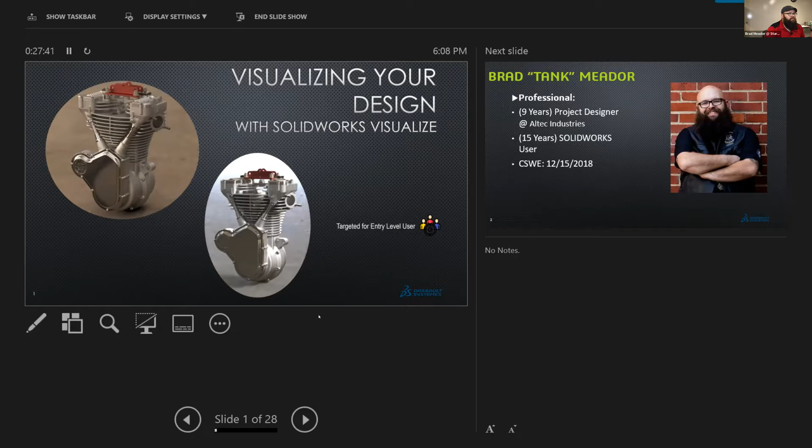But before we get too far, my name's Brad. Everybody calls me Tank. I'm a 9-year employee of Altec as a project designer. Before that, I've worked in multiple fields between the U.S. military and the U.S. government, building parts for aircraft carriers, submarines, that kind of thing. I'm a 15-year user of SolidWorks.

Like I said earlier, I was formally trained in Autodesk products, and my first job interview out of college said, if you could draw this coffee cup in this software that you've never seen before until today, then you have the job. They gave me 30 minutes, and luckily I figured out how to do it. And it's been SolidWorks ever since. I haven't really wanted to play with the other software because it's what I've been hooked on since.

So in 2018, I received my CSWE. Like everybody, I came out of SolidWorks World at the time, and I was like, man, I really want to become one of those CSWE guys that has the little flag on the bottom of their badge, because it makes you stand out, because there's only like 3,000 or 4,000 people in the world that have them. And I challenged myself in a year to get all the certifications that I could. I wanted to get it done before 2019's World, and I barely made it, but I did it.

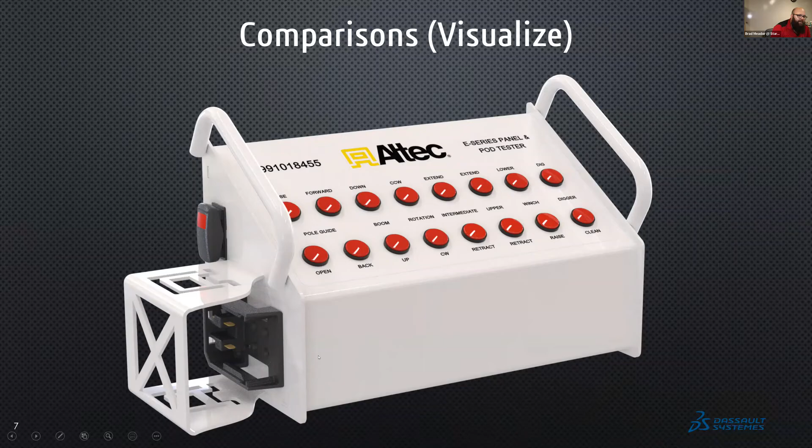Being able to go in, assign materials, assign paint colors, even down to the plastic red caps on the lights and these buttons here. These are actual plastic assigned inside. This is assigned paint white or powder coat white, depending on what you want. Yeah, Altec white.

But we can go in and customize any of those colors to whatever Pantone color you want. So being able to accurately show what they're going to order and see, this is what I'm paying you to do, not just here, draw me something up real quick and we'll go from there.

So pull back over here. Where'd my mouse go? There it is. Oh, no, it's back there.

It is. Yes. So Visualize actually comes with Pro and Premium, as long as you're on the subscription. Yes, but not on the standard. Okay, correction. And you have to be on the subscription. Yes, okay, so Pro and Premium licenses under subscription, correct. That explains why we only have one license for all of us.

So here's kind of an idea. This was the design that we were asked to create for the splash screen, right, for Altec. Yeah, this doesn't look very good. Kind of looks like a cartoon. Yeah, it does. All the black lines, all the edges. Now I can go in and turn the edges off.

Yeah, so yellow is aluminum. Magenta, I think, is stainless steel. Regular steel is kind of a gray, but if I wanted to apply some paint color, I can sort of. It doesn't really showcase what this thing's gonna look like.

So, you know, having to go in and play around with it, if I showed this to a customer, which we have before shown these things to customers, they usually come at me with questions of what's with the yellow, what's with the blue, what's with this blue piece here that's actually plastic, or this whole part right here is all aluminum that's painted. Why is it yellow?

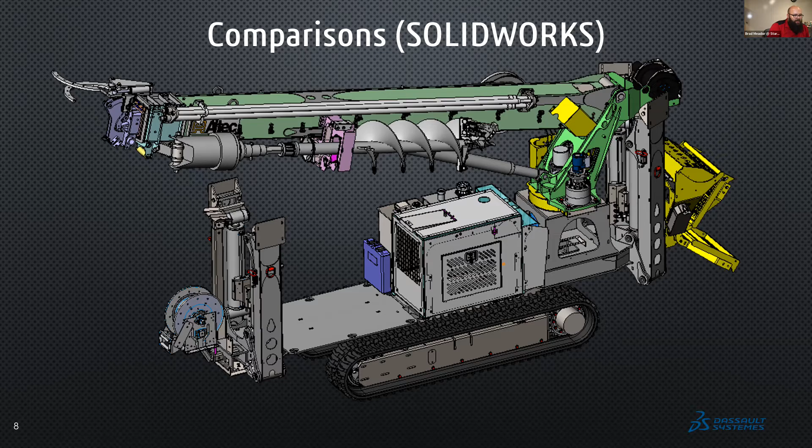So we've gone back to, come on now, go back. There it is. There it is. So this one is the right monitor up there. So we played around with it a little bit. It took me about a month to learn how to throw things into Visualize, how to compare them. So we have some stuff thrown in.

We have painted materials. We got rubber. We've got steel. We got chrome in on this. So if you see, we've got chrome on the chrome rod of the outrigger cylinder here. We've got rubber tracks. I've got even plastic dipped red handles for the safety feature, and the black painted pins, just so that we can make sure we show everything correctly. Because I want to make sure that my customer gets to see exactly what they're ordering.

And this is kind of where I started to learn and touch on the software a little bit. It was like, you know, why aren't we using this as a product? Now, for those of you who've used SolidWorks a lot, have you started looking into doing renderings before your product to showcase something? If not, why not? There's a rendering platform built into the software as well, but Visualize is a little bit more powerful and gives you a little bit more options.

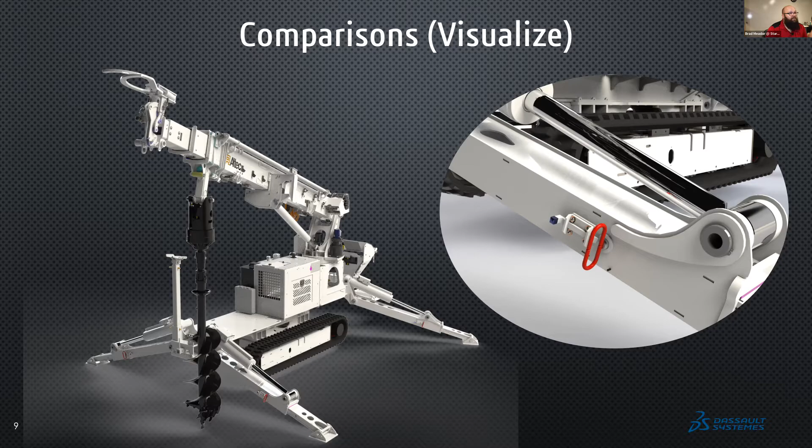So where are we going to start, right? How are you going to start with it? So to quote Adam, let's go to the CAD mobile, except what? That was weird. I know, that's ugly. We're going to the CAD mobile, except we're going to go to the render mobile, the render wagon, I guess.

Uh-oh. Share screen again to screen share. Now, all right, now we can see. Again, we should rename this the technical difficulty SWUG because every time we've gone somewhere, one little thing happens or another.

So, I know. So here's your main startup point for Visualize. Now, you can come up here and we can go up into the top and go to new. It'll create a project. It'll actually create a bunch of folders in the background. It'll tell you where you put your projects. When you install the software, it'll give you a spot for all your images, all the models that you download, all the materials. It'll let you do all of those features. It's out of the way here.

So we can come in here, we can actually find a new model we'd like, or we can import a model, which is what we're going to do. And so the best part about this is we can import a model directly from a SOLIDWORKS assembly. Snap to the floor. We can import it as we go. And there's a few different ways we can import them. So we have these options here that come up.

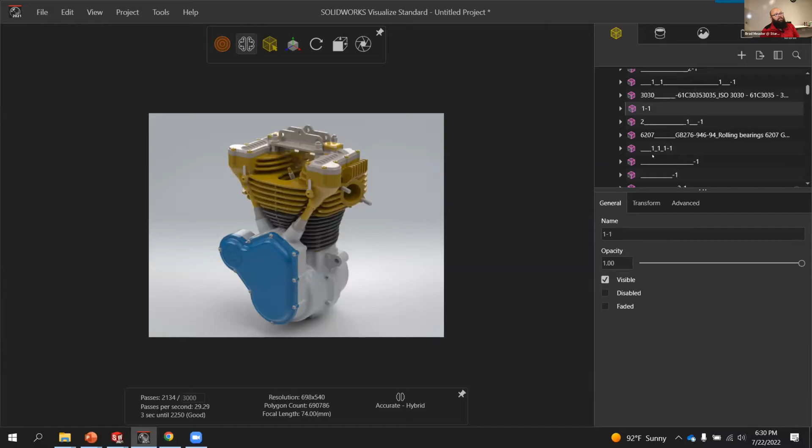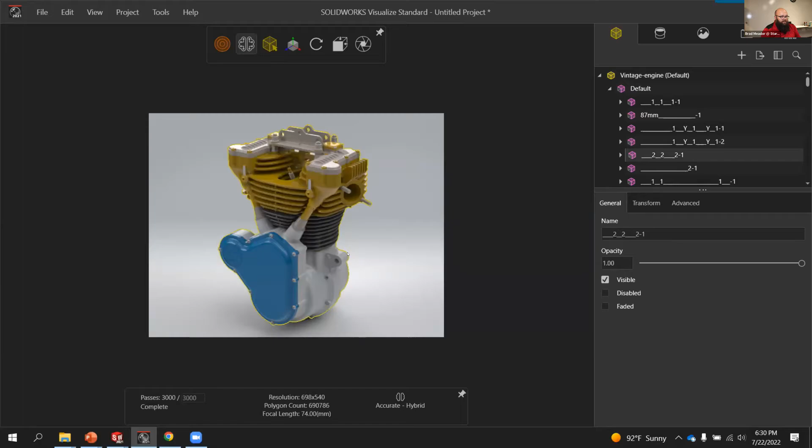So go back to general, scroll up a little bit. And so up here gives you a little default explanation of all the parts. Come on now, we slow. There you go. Now, this will allow you to pick through the tree of all the parts that you have, and you can select certain ones you want in the tree, or you can come in here in your viewport and click the things you're looking at changing. So it gives you double options if you know a specific part name you're looking for, or if you know what it's going to be shaped like. And then when you select a certain part, it'll highlight it with I think that's yellow, but I'm not 100%.

So we'll zoom in on this plate here. This one's in red? Okay. Yeah, because this does not help me at all. Okay.

So we're gonna go over to our appearances tab. Notice you can pick some cloud appearances if you had a cloud library set up, or you can do what's on your local, which is pretty much where I've been working from the entire time. And we're gonna go into automotives, and you can pick different materials. You got lights and things. We've got glass if you want to do glass. We've got weird gems and things. We've got mesh. We've got metal. So what's a big thing on motorcycles or in hot rod cars? Chrome. We just come and drag it on there, and now it's got chrome on it.

Now, I don't want to be one of those guys that has a chrome cover and doesn't have chrome bolts on those covers. So I can come in here and drag chrome and just drop the chrome on all the bolts that I want. No, zinc yellow rusts.

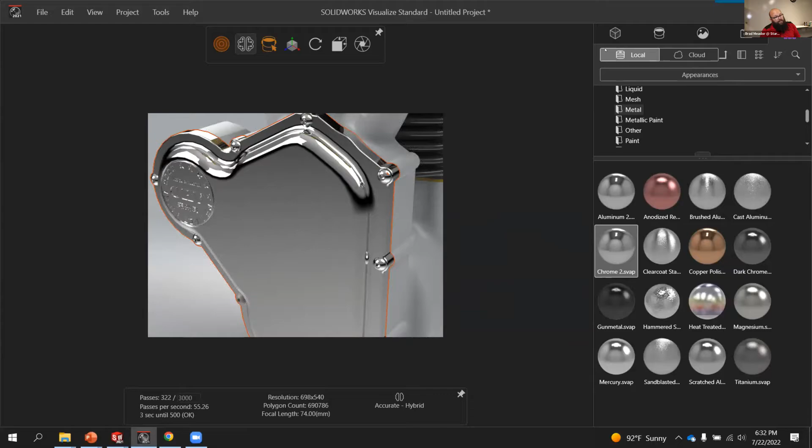If you did that as a pattern, would it do it as a pattern? In other words, if I had all those bolts located as a pattern and I click on the master one, can I make it do it all? You could select them in the tree, I believe. I've never really played around with the patterning capability. We're doing them one at a time. That's something that's still relatively new, at least to me. But it's not going to bring in any SolidWorks features, including patterns.

If you had them set up as a group of specific bolts, or a texture to begin with from SolidWorks, it'll pull them in as a group, and then you can select them from there. So if you know you're going to go into Visualize, you can pre-select the things you know will be a different color in the rendering, and change it there.

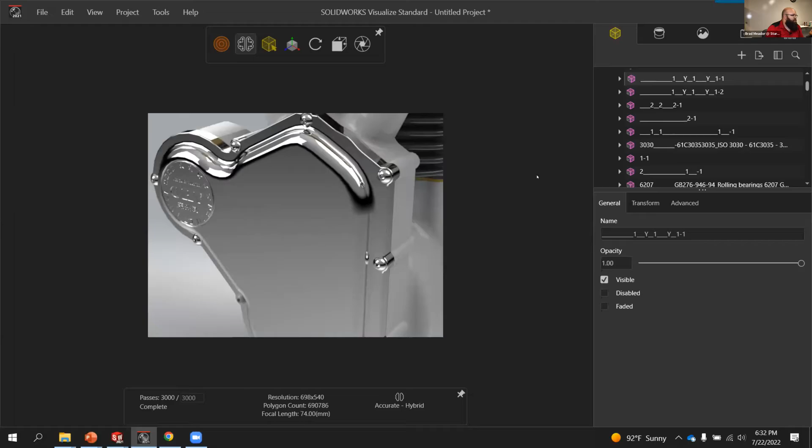Chris online made a statement saying, based on what he's saying, it looks like the video is very part driven, that's why it's rendering it. Yes, it is. Very.

So we'll go back to our textures here. We're not going to do this whole model, but I could just throw some stuff in there, just to get some photos in and whatnot.

Yeah, Chris is actually one of our guys from work. Yeah, Chris gets a gold star for being.

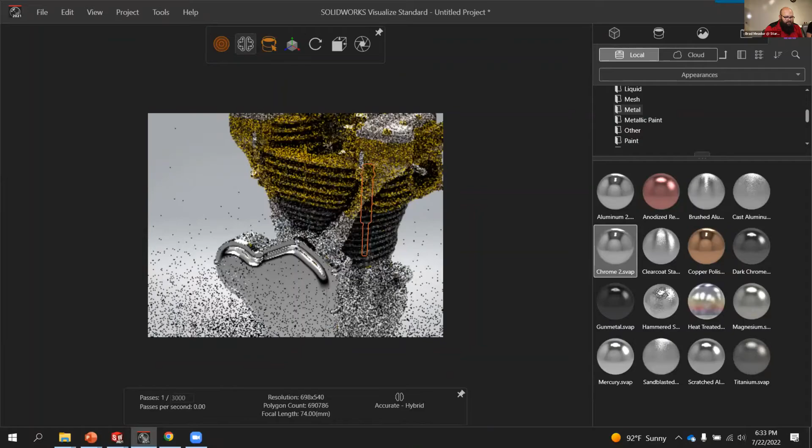So let's do some cool stuff in here. Another one of the big new things coming out is copper or brass on hot rods. I've seen some nice hot rod copper parts, so we're going to throw some copper polished pieces in.

And it's just that easy. You know, I want my customer to see it, and then I can update this picture as we go. But it's something that they want.

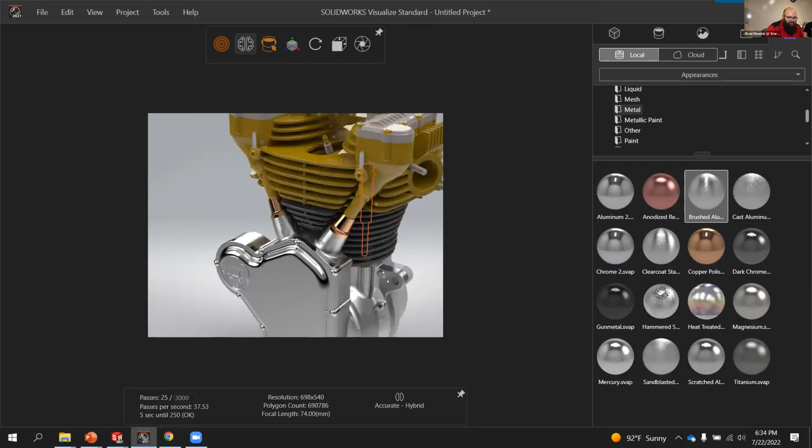So we're going to come in here and let's say this is now brushed aluminum on the case. Actually, no, let's go back - cast aluminum on the case, both front and back cases. And now we've got some parts here that are set up, right?

Well, does it look fairly good? Let's just pretend we did the whole model all the way through. Does it look okay all the way through? Now it looks good, but what about this background? It kind of looks like not a perfect background for this - nobody's going to sit an engine in a white box and take a photo of it.

Come on, we're going to come over here, come back, and find some backgrounds. We've got our environment, which has all the lighting in it, and then our backplate, which is what you're seeing in the back of the actual view. So you can change both if you'd like. I like using the high contrast lighting because it gives you lots of reflection and lots of bright edges to show, makes it look kind of outside, but we can come in here and change all kinds of things.

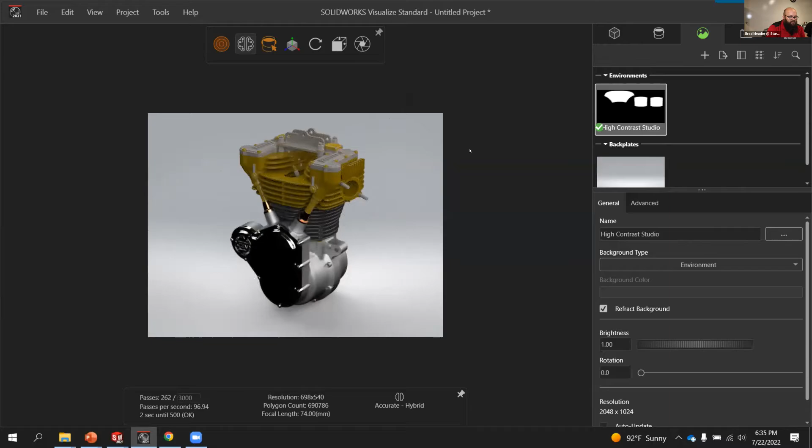So if you come in here and change your environment, we can come in and pick - so we can do studio color. It'll change the lighting, kind of give you a little bit different lighting feel. We can come back and let's pick Dazzler - I've never seen that one before, let's try that one. Not very dazzly, is it? No? Okay, so let's go back to the high contrast because that's fairly good.

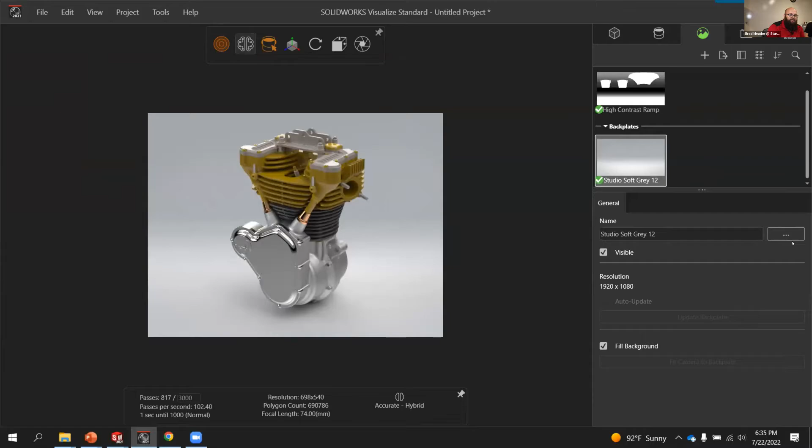It shows - I don't want studio, I want the ramp. Gives you a good representation of what the chrome's going to look like, where all the light's coming from. But I'm going to change this backplate up a little bit. Notice all I got to do is click on it and it gives you an option to change things. So I come in here and I can pick retail store - let's go pick this retail store and open it up.

Let it do its thing, let it think. Looks a little big, doesn't it? Well, we can come back, change our cameras and stuff, and zoom in on the part and move it around to kind of get where we'd like.

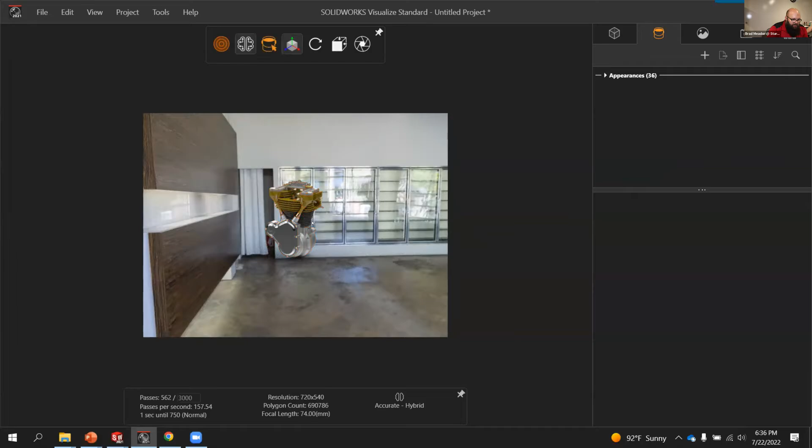Now some of these backplates will allow you to update and change - you can sit it around and move your part. Let's move it around here. Oh no, I broke it. All right, oh no wonder I can't see it, I got my stuff all the way around the way.

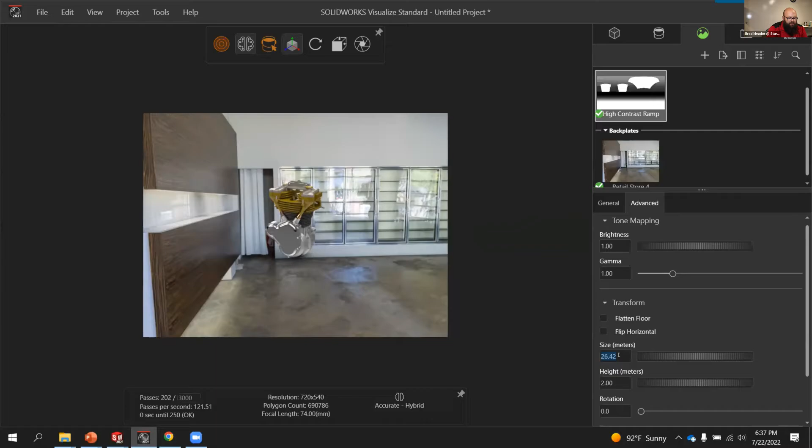All right, advanced. So we'll go over here and we can change the size of our background in relation to the size of the part you have. So we're going to kind of move this back up to where it looks decent, and we're going to change this thing. Let's go to 6 and just see what happens, and we'll set the height to 10.

Wait a minute. Oh, never mind, hold on, let's undo. I'm in the advanced of that one, not where I need to be here. Okay.

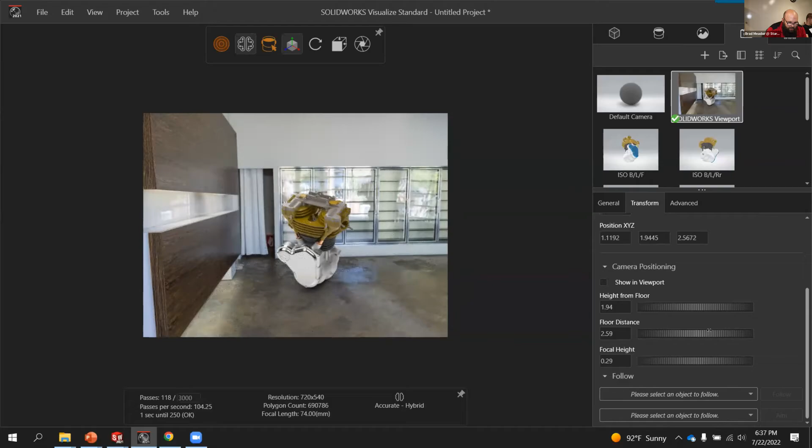Back to our camera here. We can change kind of where we want to sit this thing. We could say height from floor, floor distance. We can move where we want this thing to sit based on where our camera is at and get our right perspective.

This still looks like a really large engine for that office space though. But I mean, it is true, we could put it in the office. It's just things you can do and play around with your renderings and get it where you want.

So you could even go in and download all these backplates. There's websites where you can, they're called... I'm trying to figure out where we had the backplate file type. There it goes. As you can see, on a laptop it's a little bit slower because it's really, really resource intensive. So you probably wouldn't want to have both SolidWorks and Visualize open, but it just gives you an idea of what's going on.

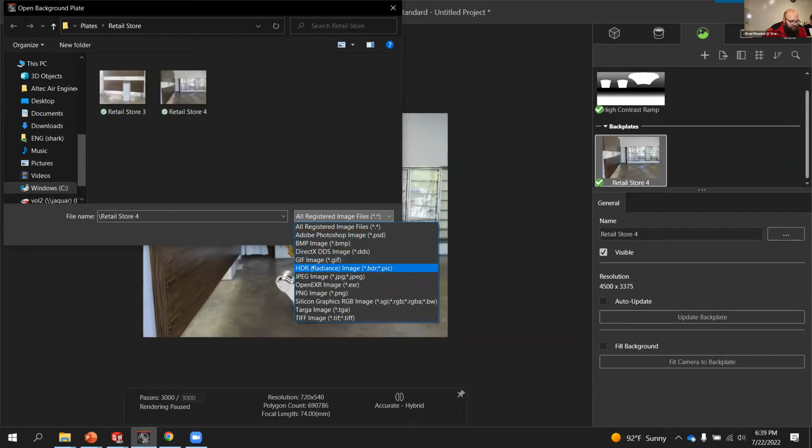But in your environment or background here, you can actually take and download any of these. I think it's called an HDR, or any of these. I think the one I used before was an HDR file. You could download any of these and use them as backplates. JPEGs, you can even use, it looks like it uses GIFs or whatever you want to call it, PNGs — it'll allow you to put in any background you'd like.

So if you have a picture of your office out front and you want to render something in your parking lot, why not try it? Get a really good high quality photo of your parking lot, and then you can start picking your parts in and start throwing them in.

Oh yeah, or the picture of the motorcycle you want to put in your office. Then fool your boss and send him a picture of his office with the motorcycle in it. Do you think that? Especially when he's working from home for a couple weeks. Yes, that'd be a great prank to play on somebody.

I like that. But yeah, it gives you nearly unlimited possibilities on how to get the picture you want to show your customer. If your customer's got a specific spot in the shop where they're going to build this machine, go in there and get a couple really good camera shots of where it's going to sit, and then render it where it's going to be.

Not that I found yet, because the way the background actually works, it pulls — at least most of these backplates come in as a circular photo, like you would use for a spherical photo for VR. A lot of the stuff is set for VR, so you can use it that way. If I'm wrong, there was something within the last couple years, I don't remember if it was made remote or what.

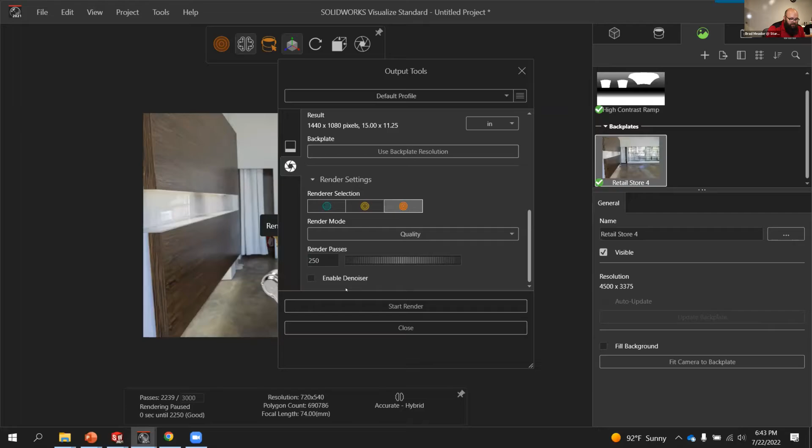Yes, not the integrated - this is actually dedicated for SolidWorks and rendering and all that. And it's done, so it's ready to go. So we can pull it up.

It just tells you where the location's at, so I can come in here, click the copy button - there's my SWUG 1 photo, and we can open it up full screen. And you've got it, and it even has the reflections and stuff in the photo that was inside the office beforehand. It's fairly good quality - you can zoom in pretty good.

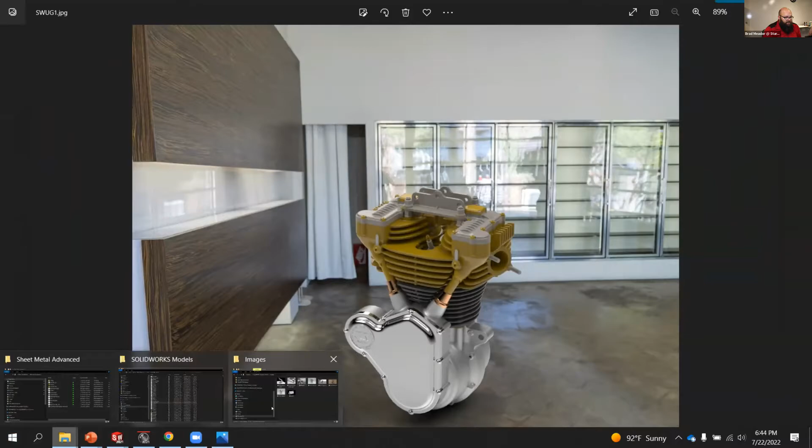Now, do you think your customer would want that more than just a regular camera screenshot of your part? I would think so - what am I paying you for, to give me an artist depiction when you can get a full rendering of it? And it didn't take very long. I think when I did my full rendering of this file, it took me a total of 30 minutes to set the floor concrete and set all the material. It wasn't very much extra workflow to pull all the data to get it done. It really is fast enough.

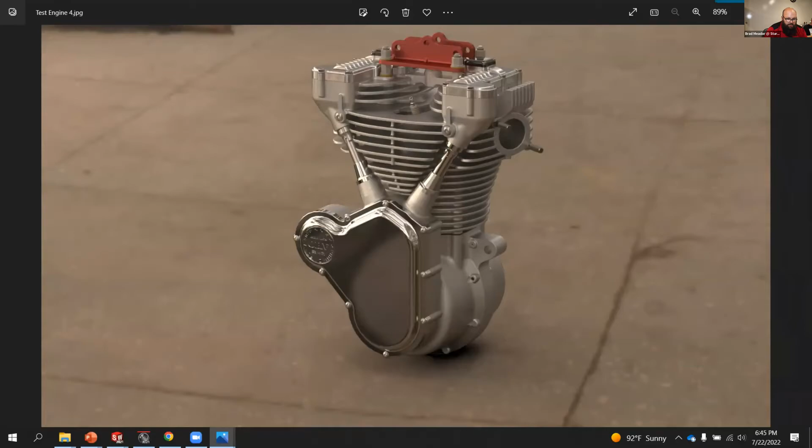It looks like on the other rendering you could set the material or whatever for certain parts - stripes or strips, yeah, you can do all kinds of textures. Like if you wanted the base material to be brushed aluminum, but you wanted the thin edges to be black powder, we could do that as well. It just kind of gives you an idea of what you can and can't do, even with these materials down here.

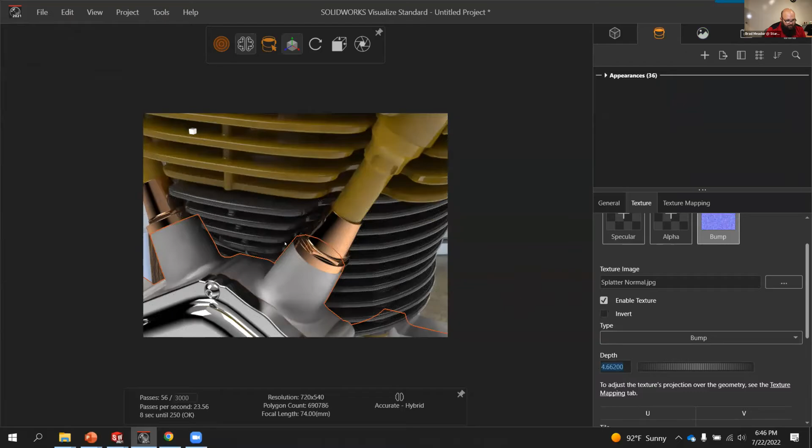So we can go down and pick our texture - that cast aluminum. You can come in here and pick the depth of the texture, make it really bumpy or not bumpy at all. You can even change it - let's go to displacement from bump, stick it there, and then we'll zoom back out. It allows you to pick and play around to get the most accurate rendering.

Come on now, I don't want to see that again. There we go - the most accurate rendering of your part as possible. So just take some time if you have a chance to play around with it and try it.

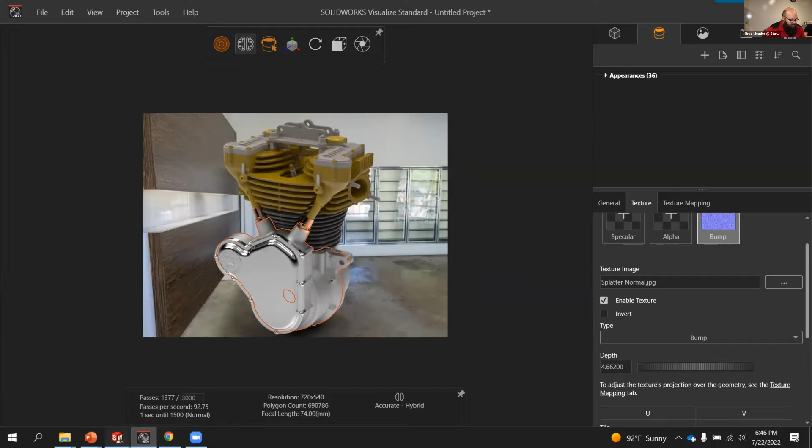Go back to our PowerPoint here. So we'll skip through because we went ahead and did our camera selections and ISO. So we'll touch on the camera. Now that I've got a rendered material or a selection of material, I can go and actually pick cameras, much like you pick your SolidWorks views.

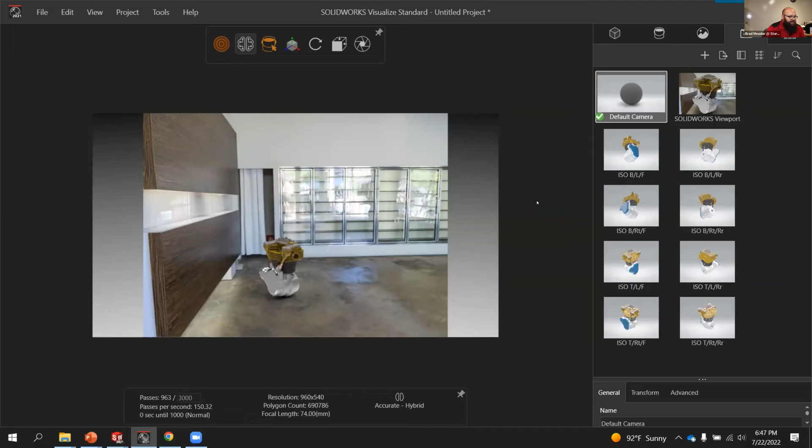And it'll sit. Well, hopefully it'll do it. Come on now. There it goes. And it'll pull different views as you need with the same backplate that you've picked. Or you can go back to your default. So it just gives you some freedom to play around and get what you need. So that looks a little bit more realistic. Still a very large engine, about the size of a coffee table, but we got what we were looking for. I know this is like a Norton or a BSA.

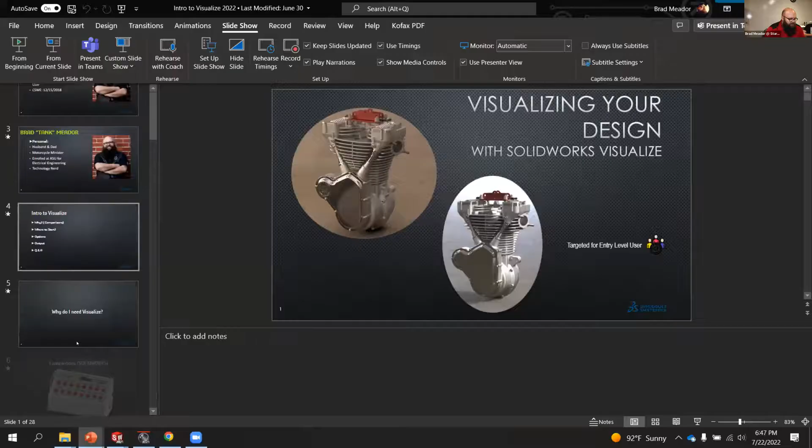But we're coming up on the end time here in a minute, so we'll just do a general Q&A, kind of stump the chump kind of thing. Oh, come on now, don't do it from there. I know. I'm so used to running it from the beginning. So any questions either about this Visualize thing or just in general SolidWorks problems you run into? If you've got a question, we can try to solve it or try to break the software.

So does any of the rendering follow the part if I send the customer a model? No, it's a whole separate file. So if you do send the customer a model and they like it, or if they're going to insert it somewhere, the rendering is just a photo at that point. Yes, JPEG or a TIFF or a PNG, whatever your output would be. It'd be good for marketing if you're trying to show them what it would look like in place. I do not know. I've never really looked into the metadata because I know that's very advanced.

We just added renderings to our website. Oh, okay. We had photographs. If you've ever tried to photograph something that's all black, it doesn't do well at all. No. The good thing about the photograph versus the rendering, it's post engineering changes. That's true. You won't ever have to worry about it looking different than the parts you get. Yeah, but this allows you to actually take those direct renderings and drop them right on your website. Send it to your webmaster and get whatever he needs for it.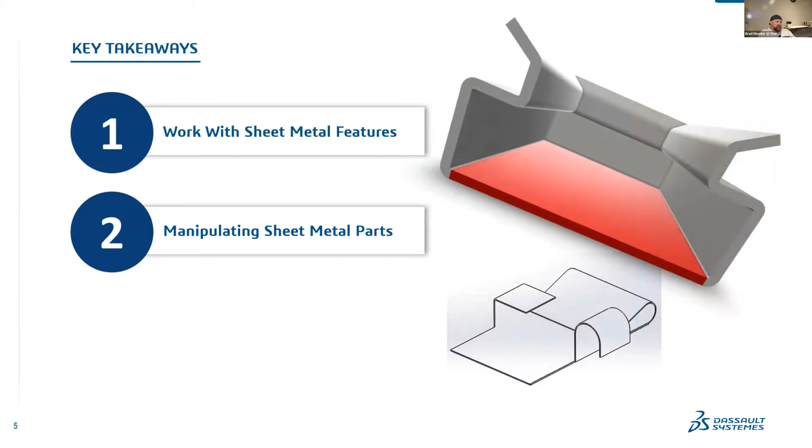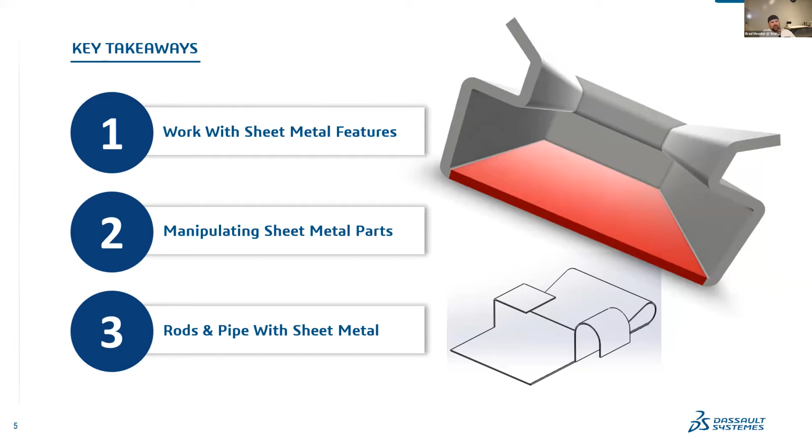So today we're going to talk about that advanced sheet metal. Some of the key takeaways we're going to look at is how we work with sheet metal and some of those features that are there, how we can manipulate sheet metal parts in different ways. And one that I like to focus on here, along with some other stuff, is rods and pipe with sheet metal, right? A lot of people just want to sweep it and extrude it through a sweep, and maybe they create the bent pipe or the bent rod, and then they go back and they sweep one that's straight so they can manufacture it. We'll get to that here in a minute, so I don't want to get too ahead of myself. I do get excited when I talk about some of these things.

The very first thing I want to talk about is sheet metal, and I brought this up in the beginners. I just didn't go as much in depth, just kind of brushed over and said, okay, gauge tables or manually inputted information, right? Gauge tables is going to be a winner chicken dinner every time, right? When you go to create your sheet metal part, if you have gauge tables that are developed and in the background for your file location to be able to find that information, you don't have to worry about mistakes. Unless, of course, they're inputted there incorrectly, but at least they're going to be consistent mistakes, right?

Because whatever you tie to this sheet metal or gauge table, everybody is going to do the same thing. If you've got 50 employees that are bending sheet metal on SolidWorks and you need consistency for your press brake operator out there, get in with gauge tables, right? It's very simple. All you do is create an Excel spreadsheet. You can basically look at this slide and create it just like it. All you need to do is say what type of sheet metal table it is, how your process is, your K factor, your units, and then you just build the columns out to where you list what the thickness of the sheet metal is and the gauge thickness and then the bend radius, right?

We have a few different ones through our different organizations and some share the same gauge tables, but that's only due to the fact that maybe at our final assembly plant, they want to be a little more precise because they've got some tolerancing things that have to do with some critical units, right? And so they may want to go to 4 decimal places, whereas we may only want to go to 3 decimal places. So that's a very important key factor here too. You don't have to worry about somebody inputting the information with the wrong decimal place or even the wrong number being off by a fat finger. Who's guilty of fat fingering things? I know I am, right?

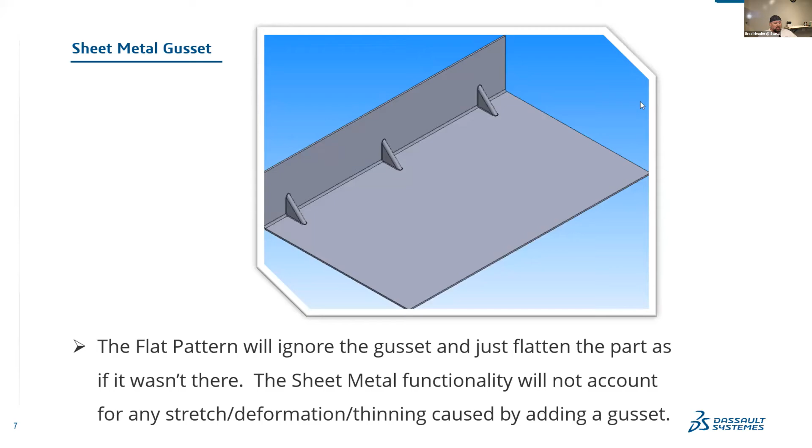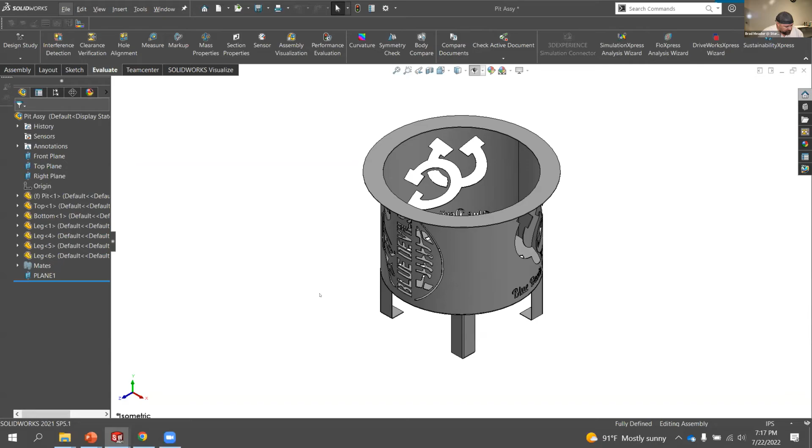But yeah, so to the CAD lab. Right here. All right. Let's see, where are we living at here? Okay, so here's our sheet metal gussets. It's basically, you just have a piece of sheet metal. I'm just going to kind of do this for just basic illustration. Let's press this guy. When you create your first one, you're simply going to click the faces that you want that gusset to go to or go between, and the edge that you want it to kind of point at, right? Or vertex.

As you do it, you can set the offset of how far you want it to be off the edge, right? And then you can set your depths and your angles and all that stuff over on the left-hand side. The next thing I did pretty much after that is I just went ahead and I patterned it out. That's pretty simple linear pattern, right? Told it I wanted 3 inches off the other side just so it matches.

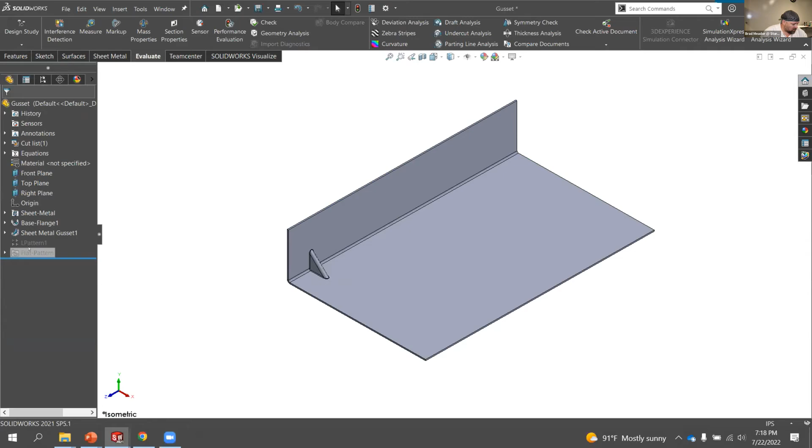Any questions about the sheet metal gussets? I mean, they're there. It's definitely able to be taken advantage of, but just to warn you that there are some issues with it because it doesn't show any kind of stretch or deformation. Same thing with forming tools a little bit too. And we'll get to that. Okay.

All right, so forming tools. Forming tools are a lot of fun. We use them a lot at Altec, whether it's to do louvers or what's similar to a tread plate to put a little knurled knob up, you know, for people to get traction on when they're walking. But the basic thing about forming tools is you have to know the tool being used, right? If you don't know the tool being used, you're just throwing stuff on a part just to say it's there. And then you get out the shop.

Let's say you made this little louver tool, right, as 2 inches long, and then you pattern it out 3 inches out, right? And you start that pattern. Well, what if it was a 4 inch, right? What's the backside of that patterned gusset look like? Oh, yeah. We can go back there and look at that. Backside of the patterned gusset. So let's just back up just a moment. It's basically a recessed indentation.

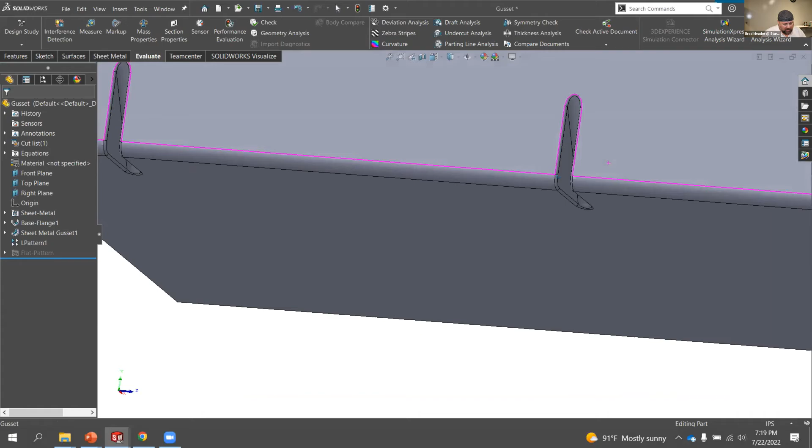Yep, just like that. Just as if you had a die or you're stamping these out. You can change the radii of this too, so that way it looks different as well. And that's all, again, based on your tooling. No different than it is with the forming tools. The sheet metal gusset is very similar to what a forming tool would be. You're going to have a tool that would actually do that. And of course, the gusset size and radii and all that stuff, that's all going to be dependent upon the tool that's used to press it.

Like you said, take it to flat pattern. Yeah. So check out the flat pattern on this guy. So let's go and just look at the flat pattern.

Oh, you got yours set up. We traded machines, so he's been working with all my crazy hotkeys that are different. Now I'm on his machine today, and I'm doing this.

So yeah, let's look at it. I got it in an isometric view, and let's just look at the sheet metal. It doesn't account for it at all. Not one bit. It's just a flat piece of metal. And we all know when you push a piece of metal in, it's going to stretch, right? It's going to have to give somewhere. You put a huge gusset in there, like I said, it's going to rip right through it. It's going to shear through it, right?

I wonder what logical case you could call to use that. I've never seen anybody use a sheet metal gusset. There's a few other little glitches that kind of work that way. Forming tools can do some of the similar issues, but you can account for that a little bit more because it's stamped into a part and they're not huge. You're not really trying to tear into the metal as bad. And usually you have an opening like a louver that helps out with it.

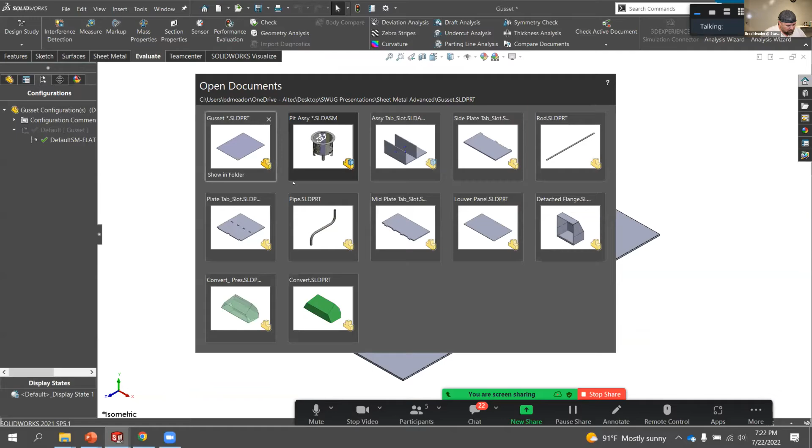Did it open? Did we see it? Yeah, it keeps jumping back. Where's SLD? Should be there. Yeah, put it in there. You see it? Louver panel. That's the panel with it. I could probably pull it from there.

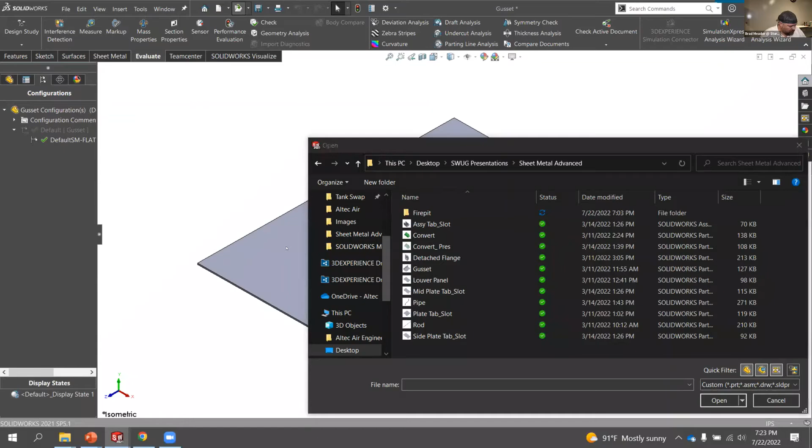Try it. Okay. Yeah, I've got it in here, so I can unsuppress it. See if I can grab the tool and open it. No, it's not gonna let me grab the tool and open it. All right, so I'll go ahead and just create one for you real quick on the fly.

Again, this is live, right? Didn't account for it. So when you model your tool, because basically what we're modeling is the tool, we need to know the radius of the tool, the length of the tool, what type of tool it is, if it's going to actually shear a portion of it, so we know what we're going to open up and show open to the sheet metal. So we have to know that information about the tool. I'm just going to use something generic.

Let's go to the right plane and see if you've got extrude boss in here. No. So we're going to go up here. We're going to go extrude boss. Now I'm just going to draw something fairly generic. Let's start out here, up. I'll give it a little bit of a taper here. I'm going to come back to the dot.

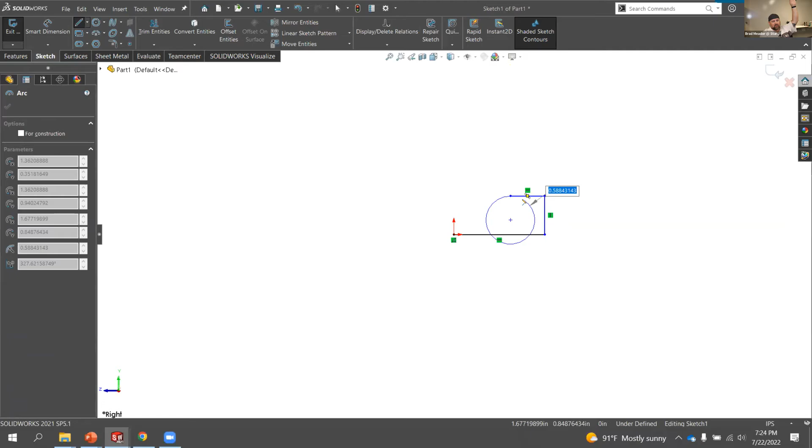Anybody know what happens when you come back to the dot? Turns it into an arc. And not only that, but whatever quadrant you come out of that dot is where the arc starts. Come out of the dot. I'm coming out here, so I want to bring it down. And then I'm going to come back to it again because I want to bring it and come here. Now notice when it came out of the dot, it actually created what kind of relationship? Tangency relationship, right? Because it also insinuated with a yellow box prior to that it was going to do it.

In one of my previous illustrations, I think it was last night's presentation, what button can we hold down to temporarily turn off the snap function and not create relationships or snaps? The control button. If we come in here and I draw this line, see how it's giving me a yellow line? That tells me that it's assuming I want it to be horizontal, so it's going to create a horizontal. If it was a white box with a line, then it would just say, I'm assuming that's where you want it, but I'm not going to create that relationship.

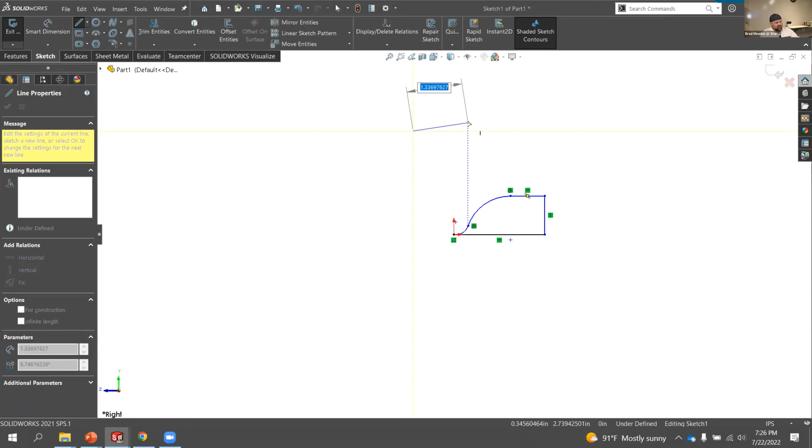But if I hold down the control button, now look what happens. No different than if I'm trying to come over here, see how it's giving me a concentric relationship? But if I hold down that control button, now I can put it anywhere I want, and there's no snap relation at all. So just a tip and trick from last night that I reiterated today. All right, so we'll just say that's fine. We want that to be like that. So let's go ahead and check that off.

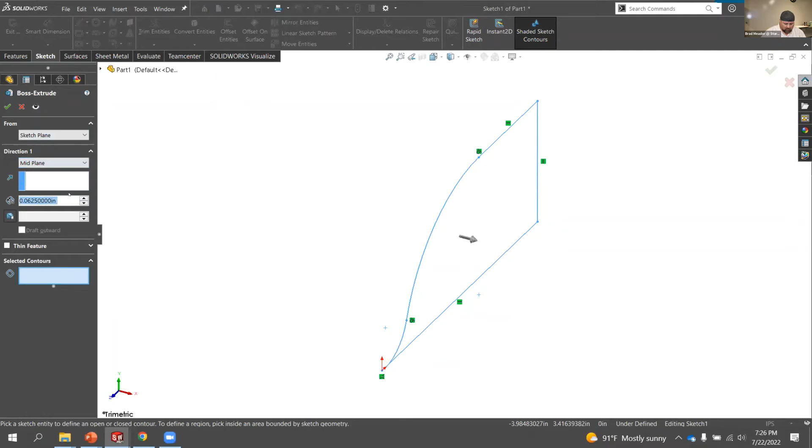I could also use the D key to bring the breadcrumbs or the confirmation window to myself. I want to go about the mid plane here. Let's make it 2 inches long. Very bottom point. Radius. Yeah, I see that. Let's just come out of it and come back. So we know we can click this line and this line and make them tangent, but you can also just click the point and do it too. Let me put that back at isometric. We're going to bring the D key to me so I don't have to go fetch the confirmation window. Now we just need to create the extrude.

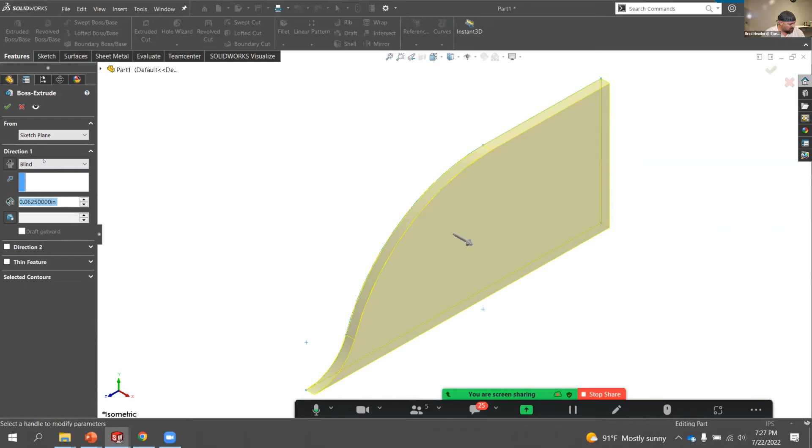Nobody would be upset that was not defined? It was not. You're right. Because we define every time. All right, so I've just got this basic louver. I'm not going to go into depth and trim and fillet the radius and all the edges, because I could go in here and create an axis and draw that down. I could actually convert entities, create an axis, and rotate it down 90 degrees on each side. Well, all right, so now

go to our forming tool command. Notice what I used. I used the command search. I didn't want to search for it on my buddy's machine. So I went up here to the command search, make sure you've got commands listed, and typed in what it was: forming tool. I can click it to execute the action, I can poke the eyeball to show me where it lives, or I can drag it onto the ribbon, and then my buddy's got forming tool living there until he decides to get rid of it.

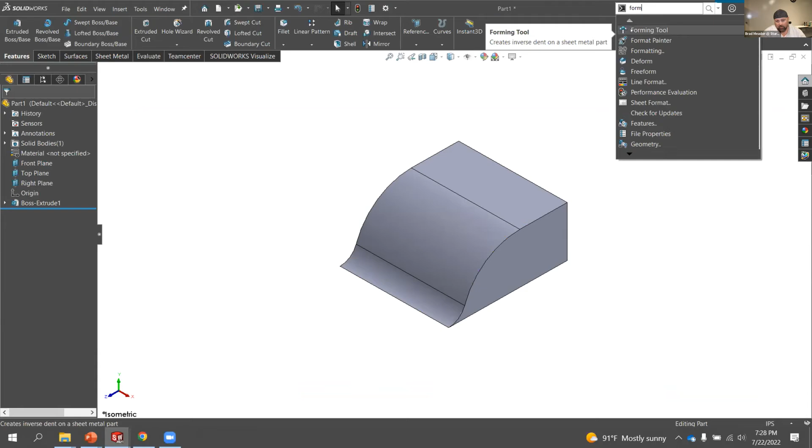All right, so we're going to go ahead and do it. We're going to talk about the stopping face. The stopping face is where that tool presses into the metal and then stops. So say this is the tool.

And this is the back plate of that tool. This would be the stopping face, right? Now, if we have a face to remove, which in a louver you do, you're pushing this through, you're removing this face here. So we click that for our removal face.

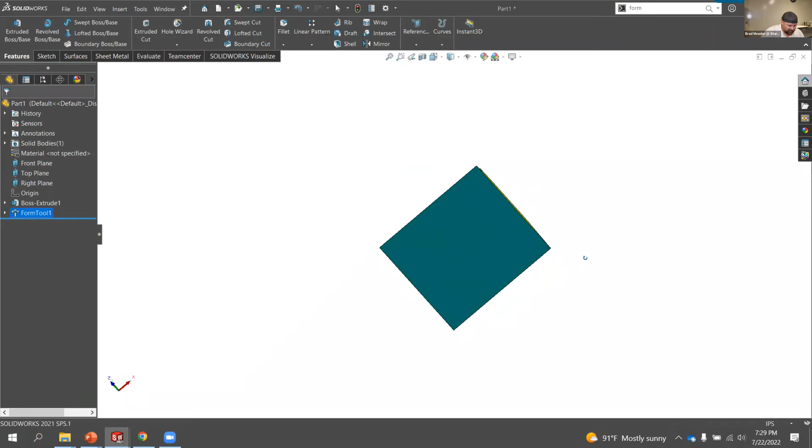Notice it changed colors, telling us this is a forming tool now. We have your stopping face ready, indicated by a teal color, or whatever color you designate it to be in your color options. And then you have your bottom face, which is red, showing that face is going to be removed. Red, delete, makes sense. Okay, now can we just save this out?

We have to save it as a certain file type, right? Actually, SLDR may work. Yeah, right here it is. Forming tool, SLD-FTP. So we have to save it out as a special file type.

Now, the thing to know is, where are you saving your forming tools? If you're going to use them later, you got to know where they're at. Somewhere something is going to need to reference it. So for this purpose, I'm just going to save this in the folder that Brad and I have shared here for the week, which is SWUG Presentations.

And then I'm going to go ahead, and I bet it's in there. I bet I'm just not seeing it when I tried to open it because I didn't label it. But so this is going to be a second one. I'll just throw it in the main folder, SWUG presentations part 1. Okay, now it's there, right?

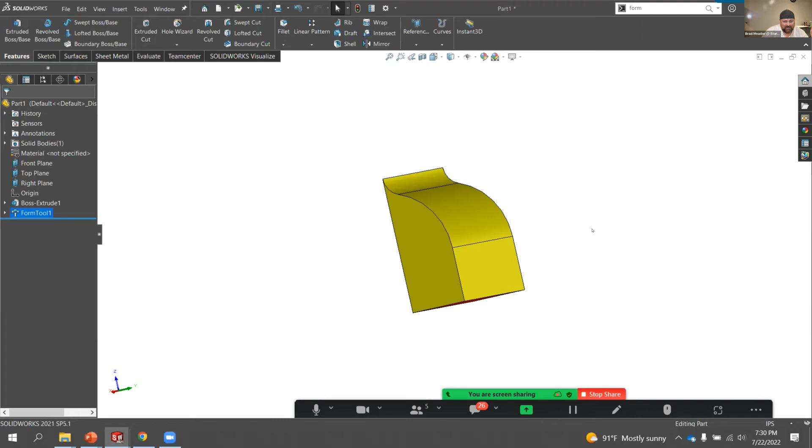But how do we access that forming tool? So if I go ahead and tab over to the louver panel I was using, notice this one's a little prettier because I did it ahead of time and made it look a little prettier. But we have to pull it from our library, right? Well, we have all these library options, and a lot of them are custom, but I don't see, I'm confused. Where is it?

It's not there. Well, we have to set that file location. So we got to come up to our system options. And this is the same place that Alex had asked earlier about the location for the diameter symbol stuff. So it's going to be kind of in the same place, in a different drop-down menu. So system options, about halfway down, we're going to go to file location.

Then we're going to come down here and look for our forming tools because we want to add it there—or our library, sorry, not forming tools. We want to add it to our library. Where's our library at? Right here, design library. We want to add it to our design library. Now we need to add that location. Where do we put that? You can have all kinds of forming tools or sketches or whatever you want to be able to drag into stuff, and just add it in one library wherever you want it.

So we're going to add that location. Look, it already defaulted to where I just saved it. So we're going to go ahead and select this folder. We don't need to select the part, because if we select the folder, which is listed here and what we're in, it's going to pick up anything that's in there. So we'll select that folder. Notice I added it here. Now we say okay.

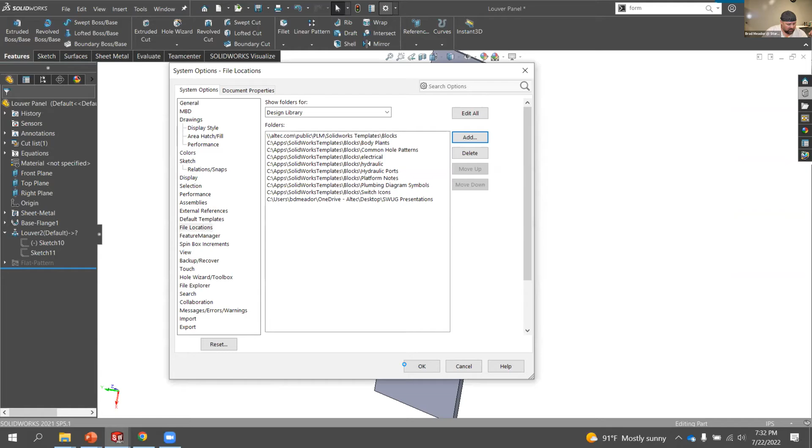It asks, are you seriously trying to add this back? Yep, I don't know why it asked you twice, but it does. And yes, so actually—now the computer's trying to make sure that we're okay with modifying options within. So a quick little note on this that trips up a lot of people: if you say yes, then you're changing that path for all users on that machine. On this machine, that's fine. If you click no, it's only for the current user.

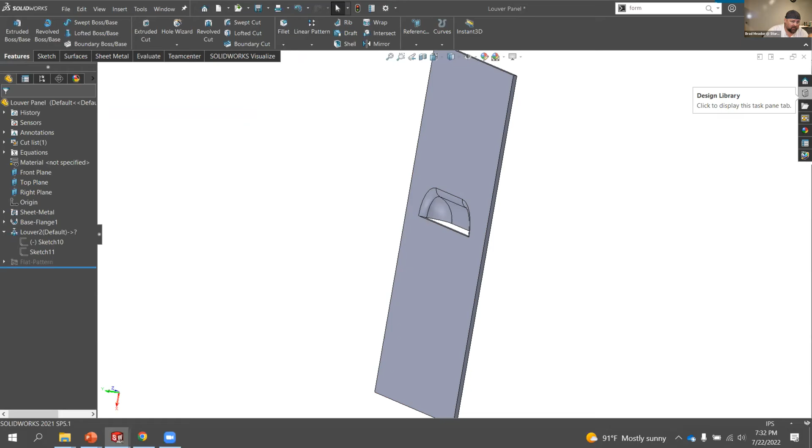That's why it bounced into that. That's why I went for admin, asked you yes or no. I don't know if you guys seen it because we're sharing screen. Sometimes when you share a screen, you don't get to see the admin pop up that comes up. But it did ask for admin permission because we changed it on all users, not just a local user.

All right, so now that we open the library this time, look what we have: SWUG Presentations. But is it that easy? Can we just drag it in now? Nope, not yet. One more step and we can get there.

One more step and we can get there, and that's called right click and make this a forming tool folder, right? It's going to ask you a question after that: would you like to do it for all the subfolders too? Well, you can pick yes or no. I don't think it's going to really matter, so I'm just going to say yes.

But now it understands that this folder is holding tools that can be used for forming. So now we can grab that tool off and punch it through.

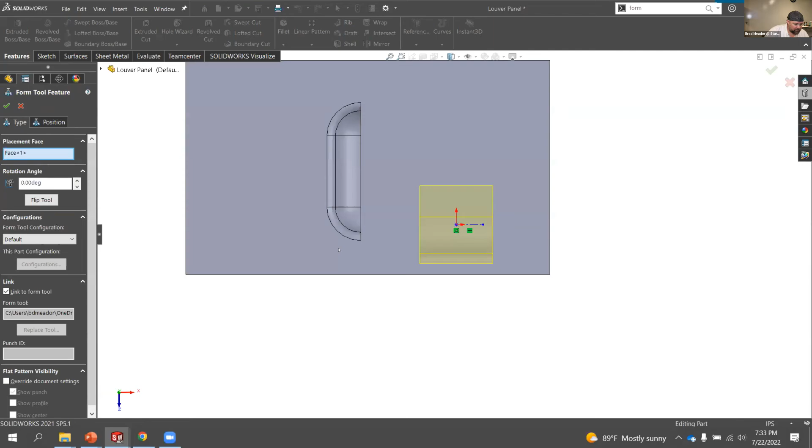Keep using your middle mouse wheel. And look what it did. Now we know, if that wasn't radius, that's going to shear that out too. So we could have actually told it to remove those faces as well. But yeah, that's basically how it simply works. Just a quick reference of it.

Another tip and trick for forming tools: when you're creating them, after you create the forming tool, you can go back and pick reference locations and points. So when you click those reference locations and points, when you go to modify the sketch forming tool inside of wherever you placed it in whatever sheet, you can locate it a little bit better and add dimensions and make sure we fully define it.

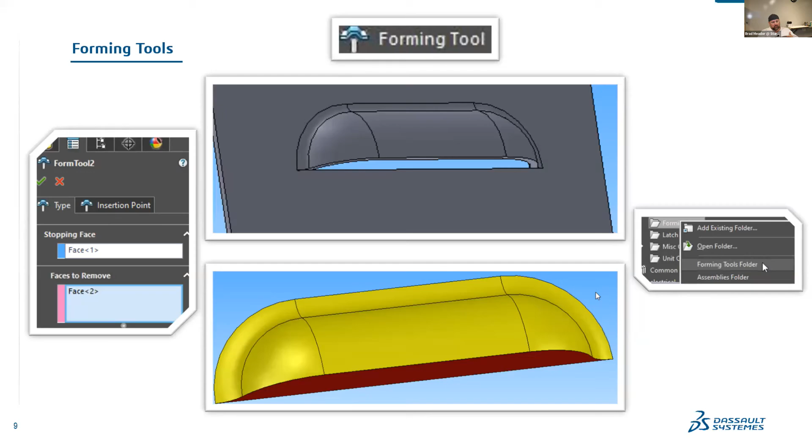Every time, fully defined. All right, so we went and showed that. May have spent a little extra time on it, but that's good, so we understand how we create the forming tool. You see in the left side picture, it kind of shows we got to pick the face and the faces to remove. The right side picture, make sure we remember to locate the folder and make it a forming tool folder. And of course, the application, we already went to the CAD lab.

Tab and slot. This is a newer feature, from what, 3 years ago? They added tab and slot in the 2020 version, I think. Is that right? 2019? Okay, so 2019 they brought tab and slot.

It's a beautiful feature. Works great, except for us at Altec. We can't use it, and I'll tell you why. It's a great tool. It's going to really benefit your shop guys.

When you talk about design for manufacturing, using this tab and slot method is great, for you too really, because technically you don't have to dimension where parts are located, right? You just tell them, plug it in like a Lego and it's going to fit, right?

So it's great. The downside to it, what we have issues with, is we don't deal with external references. We don't agree with using a lot of external references because you got users that'll go in and break stuff and tear things up and wreak havoc on everybody in the whole company, right? And our PLM has issues with it as well.

So when you create a tab and slot, you basically just do it within an assembly. There's actually a feature there, I can kind of show you where it lives. But there's a feature for tab and slot in your assembly, and you click the face you want. There's a lot of modification things you can do with it. You can click the face or the edge of where you want those tab and slots to be. You can give how much gap you want between the tab and slot.

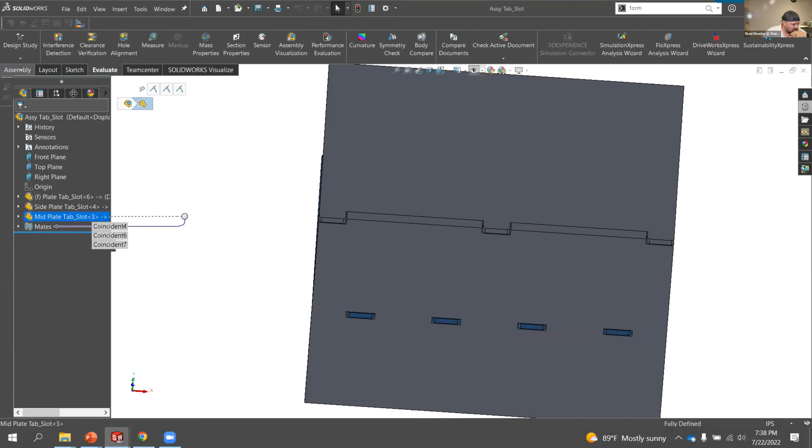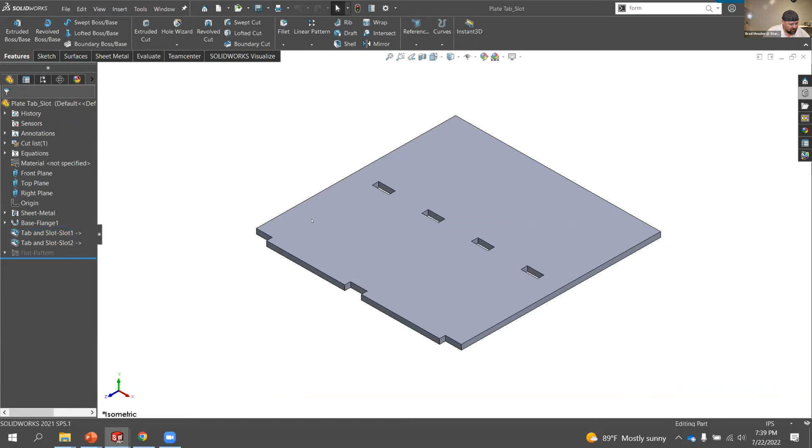All right, so we've got these tab and slot features, and if we edit or modify it, notice the part edit paired to the tab feature instead. As we edit this one, it allows us to—so you're not editing the slot side, you're editing the tab side, and then it's going to link it all back together.

Now here's where you select the edges and stuff. When you first do it, you're going to select the edge in the assembly part. Actually, the way you do it, I'll just go back and do it this way. Okay, we don't want to do that—go away.

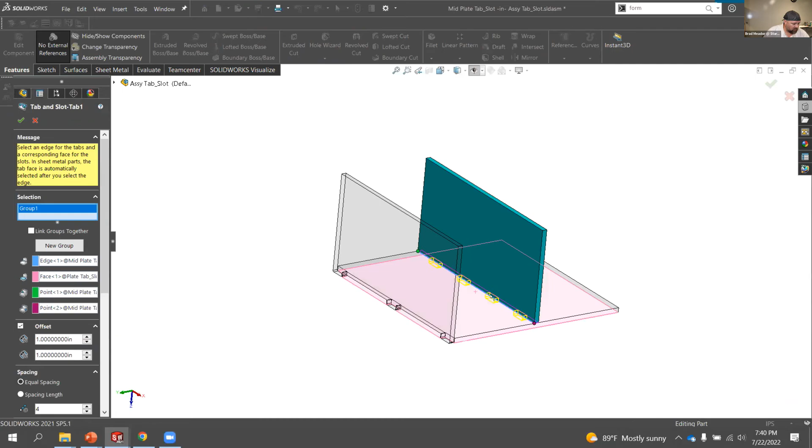Because you edit the part in place. So for example, this guy—if I come in and edit it in place, notice as it turns teal blue, we can go and modify here. Now when you select the tab and slot feature, you're basically editing in place. You select the feature, then pick the edge you want, as well as the face.

I'm using your middle button again—got a middle button and a middle wheel. Yep, Tank's got the 3Dconnexion one, so I've got three buttons and a middle wheel, and I'm used to the middle wheel spinning the model, but his middle button actually does it, and that's why you're seeing some of that come up.

All right, so it's basically told us the faces and everything. If we come back into the feature—we accidentally exited out—you've got the different faces you're going to select. You're going to tell the offset that you want, as well as the length of it, as well as the tabs—what you want to do with the tabs, how far you want them to go down in. So maybe you're doing some kind of plastic, and you have the ability to only go so far deep.

This is the edge type—whether you want a square edge, chamfered edge, or radiused edge, and how much you want that, as well as the gap distance around it. On the edge, we only had a gap distance on the side. We do have one on one side too, so I guess we'd put it there, but this is gap distance all the way around—on the sides and then on the front and the back.

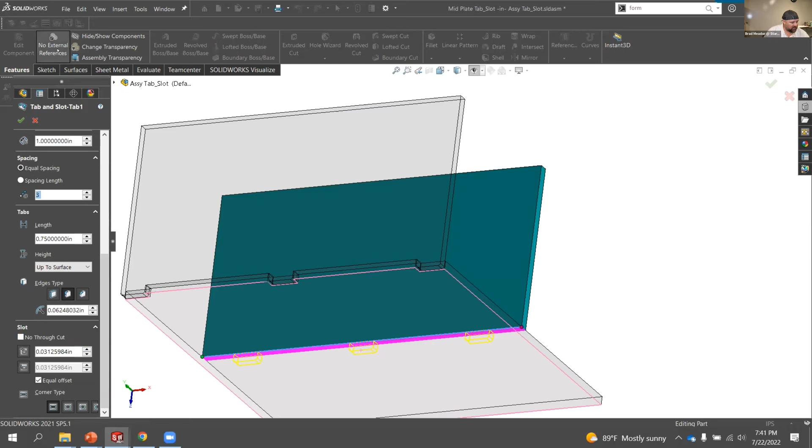But again, we have no external references within our company, so we keep that checked—and if you want to break them, you can. So if we go in here, we can right click on this... where's it at... break external references. External reference right here—we can select it and tell it we want to break the selected reference. But again, that goes back to what I was saying: once you break it, it's pointless to have even had it and created it. Okay.

Next thing, detached flange. Now, I'm not going to say everything in this advanced sheet metal is going to help you on a certification somewhere, but this is what helped me on one of my questions of the sheet metal exam, right? The professional advanced sheet metal exam. There was one where they wanted you to bring a piece of sheet metal to a certain point, and everything about that was dimensioned. You didn't have a lot of dimensions about everything else. So I'm thinking about that.

I was like, okay, what if I want to make this little box that, I don't know, held my bolts, right? That I could hang on the wall, right? But I knew I only had a certain space. I was confined to a certain space, right? And I wasn't really sure of the angle on the back, but I knew how deep I could go in the top and how deep I could go in the bottom, right?

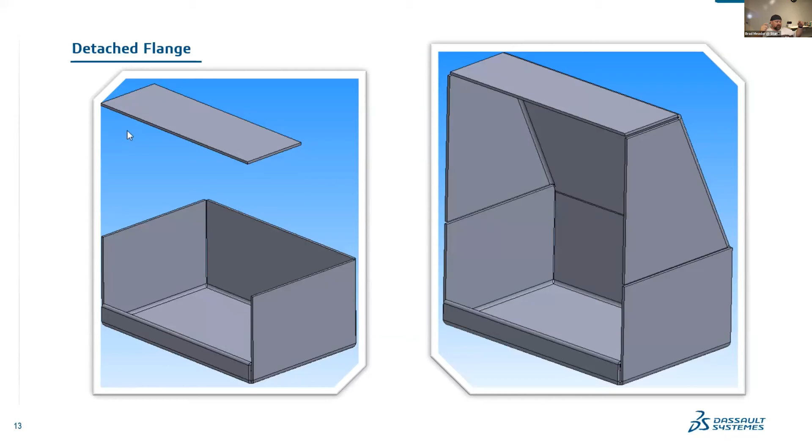Again, that helped me out in that tight spot. We'll skip this. Here's another one that may or may not be on that sheet metal exam. And I don't want to say all these are, because they update it and change it all the time. And the questions I got might not be the questions you get, right? But something that every SolidWorks and sheet metal user needs to know is how to create sheet metal off of a non-sheet metal part, right?

And one of the bends, and put real thin features so somebody can go back and hand bend it, and then maybe you weld it back up. Who knows where you get your rigidity back from. So think about that when you create things with sheet metal: can it even be bent after I do this? Where do I need to put my stop and starts at? Do I need to do it in multiple parts, right? We'll look at this guy a little bit, because this is kind of fun. All right, to the CAD lab.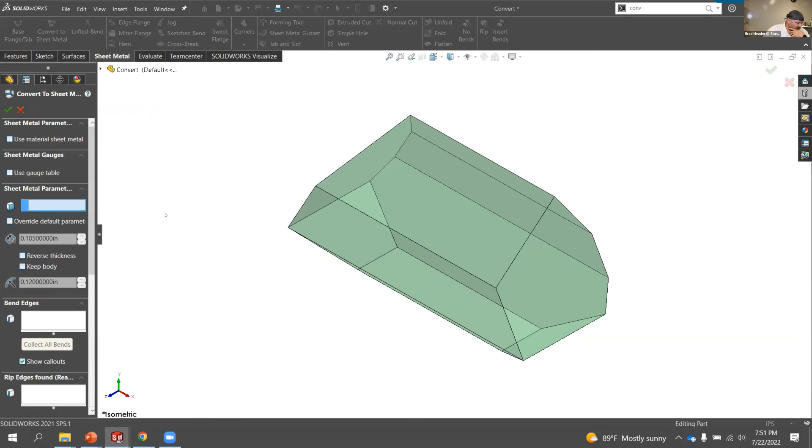All right, so in this, we're going to talk about bend edges and faces and where we're going to start. So I'm just going to start on the top. And now it's asking you what edges you want to be part of that. Where do you want that to wrap, right? So let's think of this being a piece of sheet metal. We just laid a piece of sheet metal on top. Now where do we want to go?

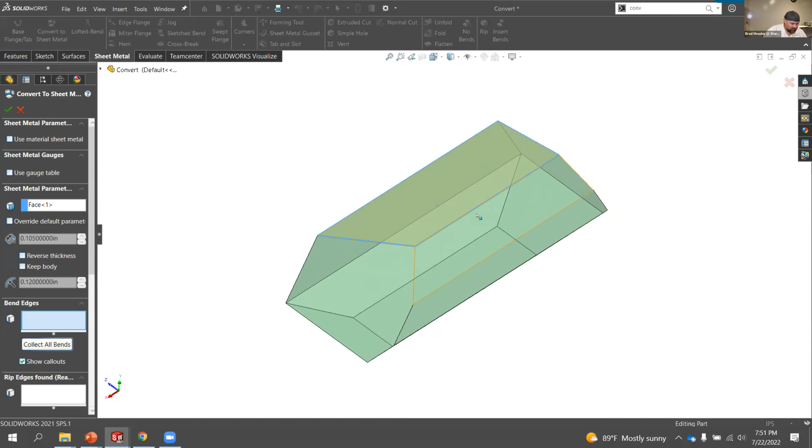Do we want to bend it down the back? Okay, let's do that. So we're going to bend it here. Now look, that sheet metal just bent down. We're going to go to the next edge, and we're going to say now we want it to bend here. Okay, well, maybe now we want this one to bend out this way. So you're first picking where you want to start with the sheet metal, and then you're picking the different edges to come around, right? Also, another thing to be careful with this, and I'll show it inside of another one, just for the better example.

Let's go to our gussets, right? Notice the way this laid down. When we went to our flatten, it basically held this down and folded the top, or the 90-degree up flange, down, right? In some instances, especially if you have an older sheet metal part and it's in a drawing and you change some things, it might not be matching. Your views might not be projecting the right way.

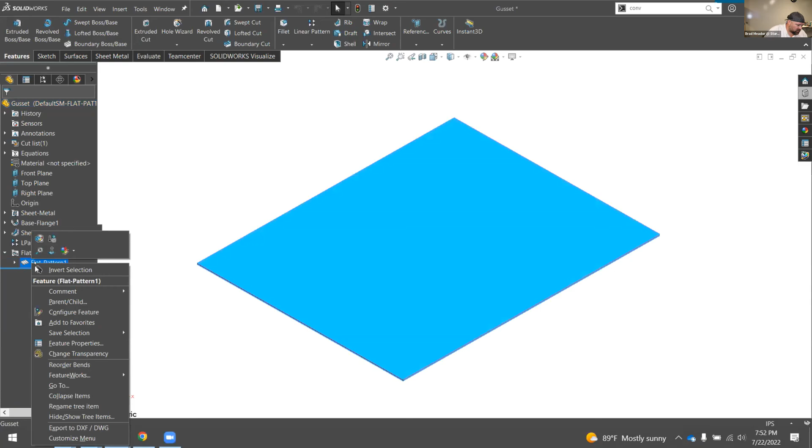And that's usually because when you come back to your sheet metal part and you expand here, go ahead and right click and edit the feature. This face is not picked right. That face is the face that you want to be held down to the machine, or what you're holding when you go to bend it, and how you want it to be depicted on your drawing. I know I touched on it in my earlier sheet metal, but I told everybody I would touch on it more here. So we want to pick the face.

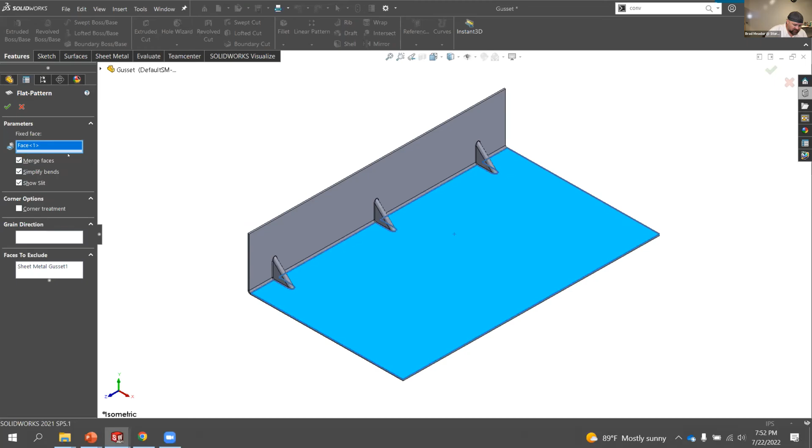So watch if I change this face and delete it. And now I pick the back of this face. See how that changed? Let's go back. Let's form it, and now let's flatten it. See how it flipped down now? So that's big, especially when you're looking at your drawing and you want to know how things get bent and the projection. But if you ever have an old school sheet metal part where the projected views aren't right, always come here and look first, because that could very well be the problem.

Sometimes if you choose the top face or the bottom face, it flips it. Yeah, it'll flip the part. And that's where I've seen the most issues on the prints, because the projected views are the opposite of what they should be because somebody's flipped the flat. Exactly. Yep. All right.

Now, do you have a sheet metal tab for your rods and pipes? Of course, if you're using rods and pipes and that's all you're doing, you might not use sheet metal. And I mentioned this in our second presentation of the week. We were actually at American Cast Iron Pipe Company, the Birmingham Community SWUG. Their company has a lot of members in that one. They were talking about the pipe and weldments and things like that. So we gave a lot of advice there and had some presentations. But I did bring this up vaguely due to a question, and I said, guys, tune into this meeting and you'll be able to learn more about bending sheet metal and pipe.

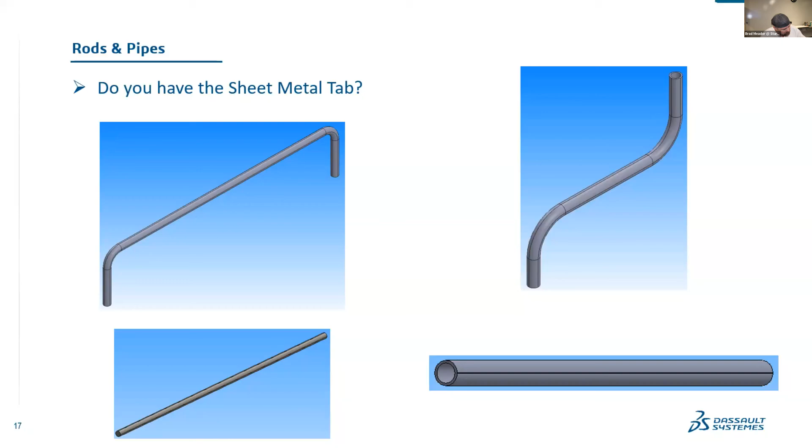Nope, didn't want to do that. All right, here's the final slide in this presentation. This is a troubleshooting moment that I had. Does anybody know what this is? Anybody guess at what that is?

Fire pit. Yep. So my kids play football for the Unicoi County Blue Devils just over the mountain. And it was said that they wanted to have a bonfire for when they win. Of course, right after it was built, it was like, we lost. Can we still have a bonfire? So it was really just a social gathering point for most of the football team.

And it was really cool because you put the fire in there and you got the Blue Devil's head. I'll actually kind of show you the model of it. You got the Blue Devil head on one side, Blue Devils, you got the football, and then of course Unicoi County, the Blue Devil football team on the other two parts of the triangular quadrants, I guess you want to call it. But the problem here was not really the way it was drawn, but the way SolidWorks wanted to flatten it, or should I say, not be able to flatten it.

So I did it as a tab extrude, as an open contoured design. Instead of closing the contour, I kept it open because I knew the radius that I needed to have. I knew when they put it in the roll former, what we were able to meet when we rolled the piece of metal. So I extruded it to the inside, did about mid plane and took it up and down the height I wanted. And then when I went to flatten it, what the heck? No flat pattern. How did I get the flat pattern?

If we look at the drawing for this, I probably don't have it on here, but I do have it in the slide. How did I get that flat pattern? Well, I went out of the box and decided sheet metal wasn't the time to flatten something, but surfacing could do it. If you have a problem flattening something, use surfacing. Surfacing will pick a surface on something and flatten just about any dang thing you want to flatten. So that's what I did. I went to surfacing.

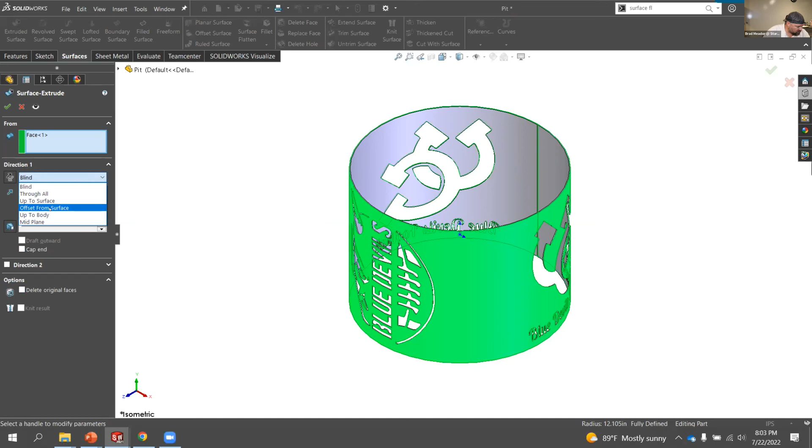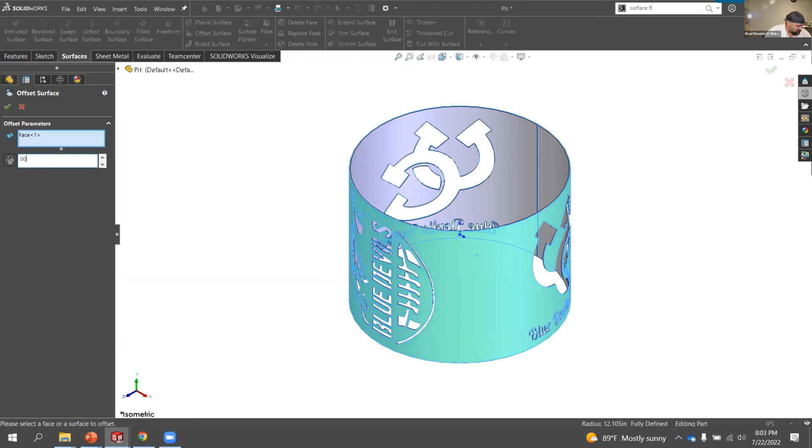I don't have a dimension in there now though. So get out of surface extrude here and try offset surface. Offset surface. And this one you did offset to 0. Yeah, exactly what I was getting ready to say. All right, now that I've got the surface, I can come back and flatten it. Still not there. No. We broke it. I have a surface body here. It's been done. I've done it.

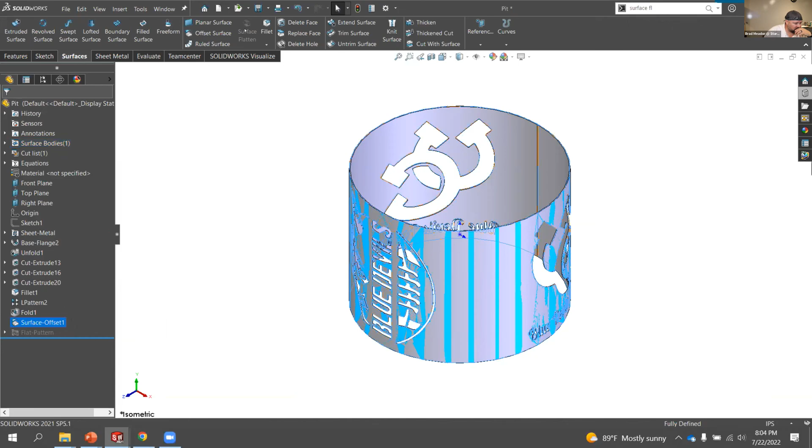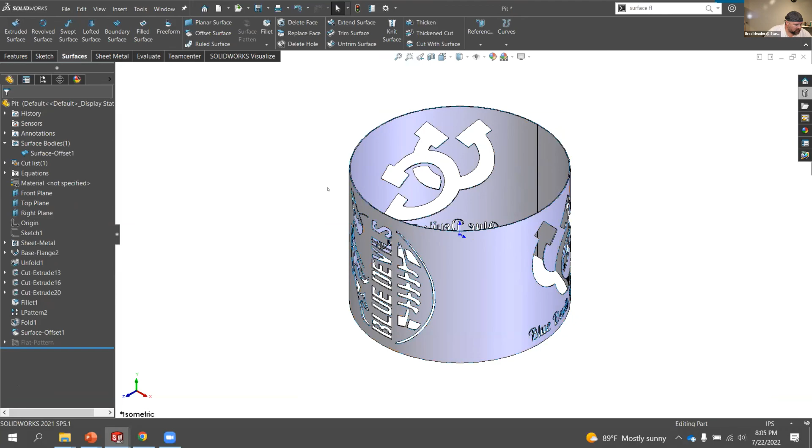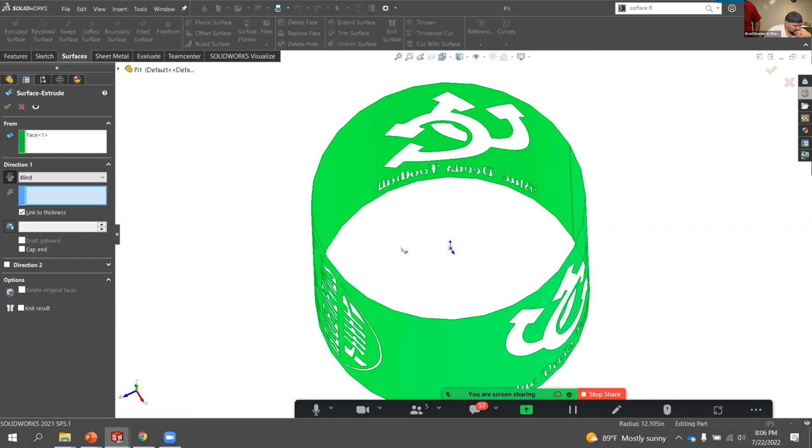Oh, the direction, yeah, I see it now. It's collapsed. That's just direction 2. Direction's there. But it's not allowing me to give you a direction. Yeah. We've officially done it. We've broken it. We broke it. He said, can you pick the direction? Chris says, can you pick the direction under the line? Oh, let's go back.

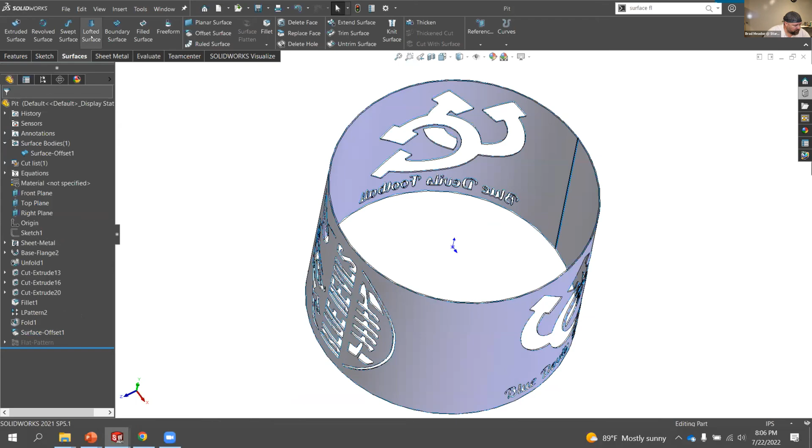Bring that back. Now let's go surface. Surface extrude. Surface. I picked you. Do it. It's a premium feature. Oh. That's what it is. So in our haste to try and make sure we had SolidWorks downloaded and didn't have to worry about our VPN, we checked out SolidWorks and it wouldn't let us check out our premium feature. So we are actually running SolidWorks standard.

So for everybody out there, yes, it would have worked like I originally intended if I picked the surface and I could have actually flattened the surface. Problem being is we didn't check out the professional because it wouldn't let us. Or premium, I'm sorry. Yeah, we're just running SolidWorks standard for these presentations.

You just did it. Nick just did it? Awesome, Nick. Thanks for verifying that, because I know I wasn't going crazy. I knew how to do it. So it's the fact that we were only able to check out standard instead of premium. That's what happened. Didn't want my presentation to go down the drain with the last presentation slide, but we did. And that's what these user groups are for. Yeah, because I would never have thought that flatten surface was a premium tool. But now we know the rest of the story. So be careful with that.

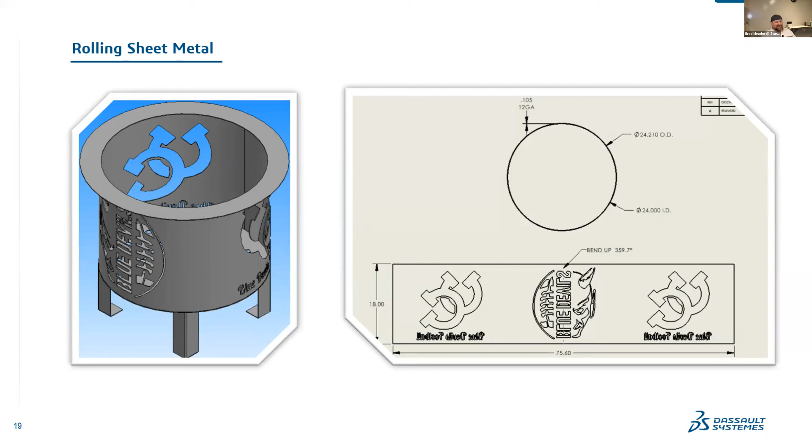Already went to the CAD lab. So just some general notes for future reference: gauge tables are super important. They make everybody stay on the same page, make for consistency and reduce the fat finger errors, right? Second note, almost anything can be unfolded. We just got to think outside the box and have premium. The third thing would be tabs and slots can help you with alignments and the design for manufacturing process, but just remember that they have to have external links if you use the feature that has been implemented from 2018 SolidWorks. Detached flanges can help be within parameters.

What time is it? 8:09. Yeah, so we're pretty much out of time. I can show you that, Chris, on the side if you want to holler at me. It's pretty easy. It's basically just making a plane somewhere and putting another tab on it and just connecting it. Cool. But detached flange can help you stay within parameters.

What I'd like to tell everybody, and Tank's already said it, is no matter where you go, what you do, whether it's within SolidWorks, outside of SolidWorks, your daily life, but especially being that we're in a SWUG environment now, is give it a try. Take at least one thing back with you and put it to use. Of course, you're not going to remember everything we said today, but if you could take one thing back and try it, and if it sticks and you like it, keep running it. If not, throw it out and try the next thing. But start with the basics and create it with intent.